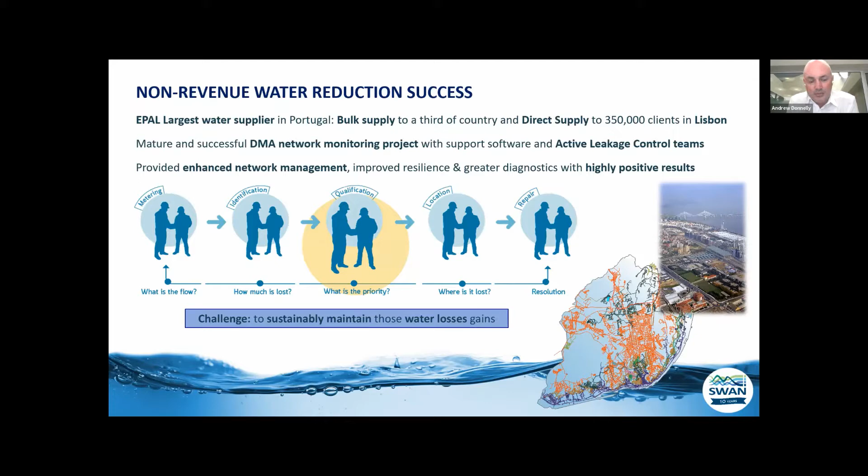How have we done this? I would call it sort of a classic solution of network metering and monitoring, which allows us to identify where the problem is. We then qualify the problem, what is the priority area, and we go out and find the leaks. Hopefully we find out where it's lost, and then we do some repairs at the end to make sure that it's all resolved. But the challenge is to sustainably manage those gains in water loss control over the years.

So again, just to set the scene quickly, we spent largely 4 or 5 years implementing a DMA monitoring system within the distribution network in Lisbon. The results followed quite nicely up to about 2010, where we entered a very stable period of 5 years - we've got the systems, we've got the tools, we have the data, we've got the staff, steady state, constant performance - and then it all started to go wrong again in 2016, where we started to notice an increasing trend in non-revenue water again.

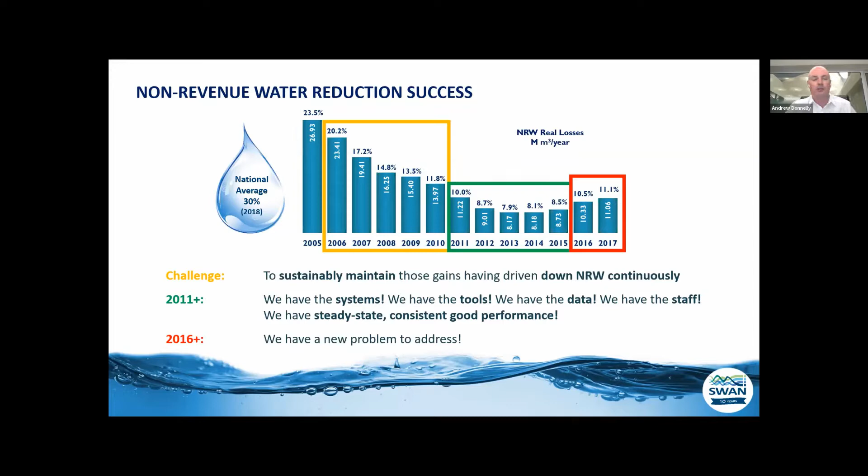Because we have essentially a full DMA rollout across the whole city, as you can see from the map, we were able to quite confidently say that the problem wasn't within the DMAs, but we identified 2 supply zones, about 150 kilometers of mains, where the problem was. So we could eliminate 90% of the network and concentrate only on the 10% that was giving us the problems.

What we did, and I think most other utilities will say the same thing, is that we don't have the same intensity or density of metering and monitoring of our trunk main networks. As I said, we've got target areas of 150 kilometers or so, so how were we going to narrow down where we thought the problems were on that trunk main system? We came up with a new methodology which we rolled out for this particular problem.

We used our hydraulic model to simulate a series of alterations in the network, using DMA meters to temporarily monitor short sections, say 1 or 2 kilometers of these trunk mains. As you can see from this diagram, we opened the boundary valves between a couple of DMAs, continued to feed them normally, but reversed the flow through one DMA meter with closed valves, which allowed us to estimate the volume of losses on a relatively short section.

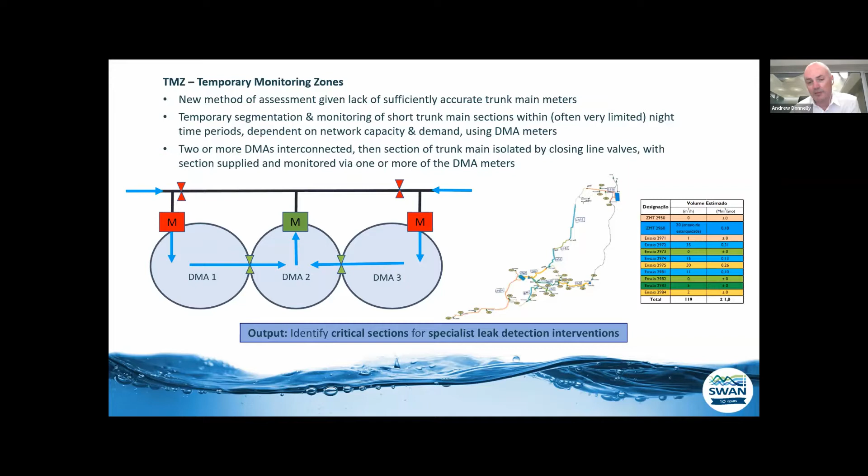Where we could, we did normal leak detection using standard correlation and geophone methods using company resources. We then planned and implemented a Sahara campaign via Xylem and WRC, and a SmartBall trial as well.

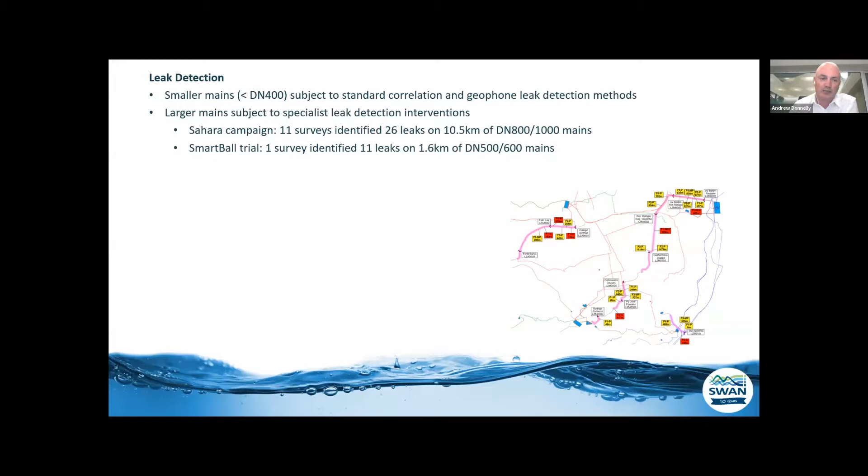These trunk mains run underneath the main streets and motorways within the city. Neither the council nor the police are going to let us go in quickly to do those repairs, and that's why it took us so long to do them - factors which are outside the control of the company.

The SmartBall repairs were done as well, but the SmartBall had to be used in connection with other leak detection techniques to actually pinpoint the leaks. But the results were remarkable in that the non-revenue water in the 2 critical supply zones was reduced by 20 and 45%, equivalent to around 2 million cubic meters of water lost from these activities.

The result of that was a very positive impact on overall company water balance.

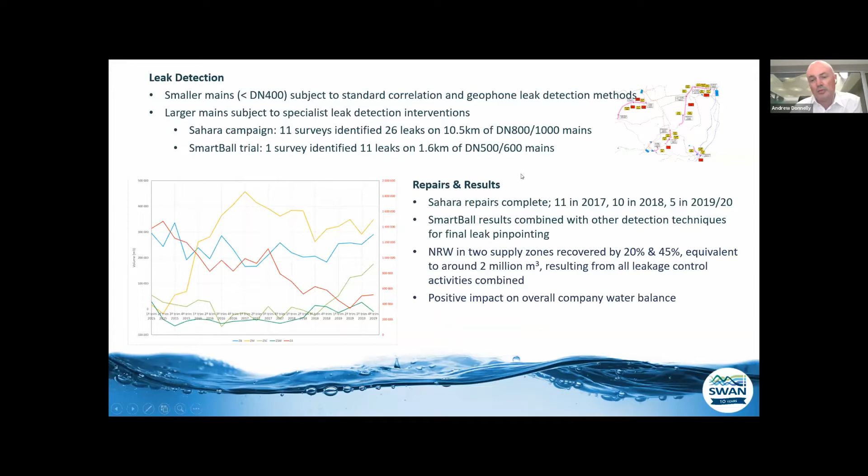In the future, what we would do - we've identified some areas where some additional trunk main meters would be nice to have at a few key points to help us with these temporary metering strategies.

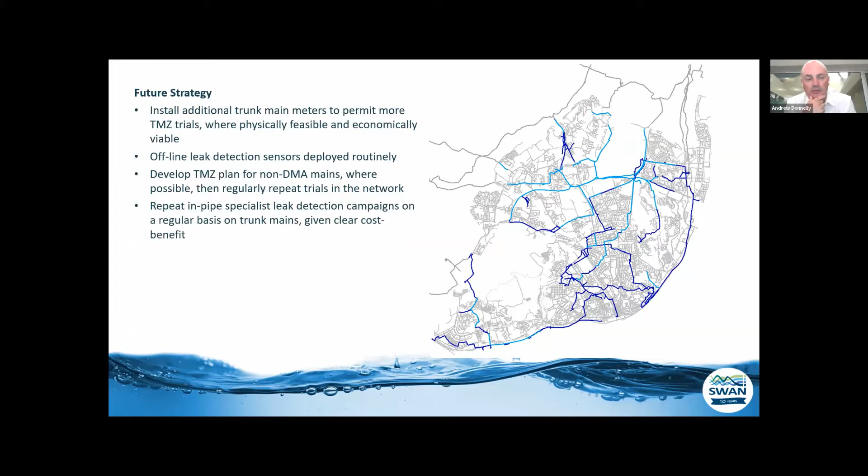We use offline leak detection sensors, deployed more routinely than they ever were. We're developing these temporary monitoring zone plans for all of the non-DMA mains, where we can then repeat them on a regular basis. We're going to repeat in-pipe specialist leak detection campaigns again regularly, given there's a clear cost benefit for them.

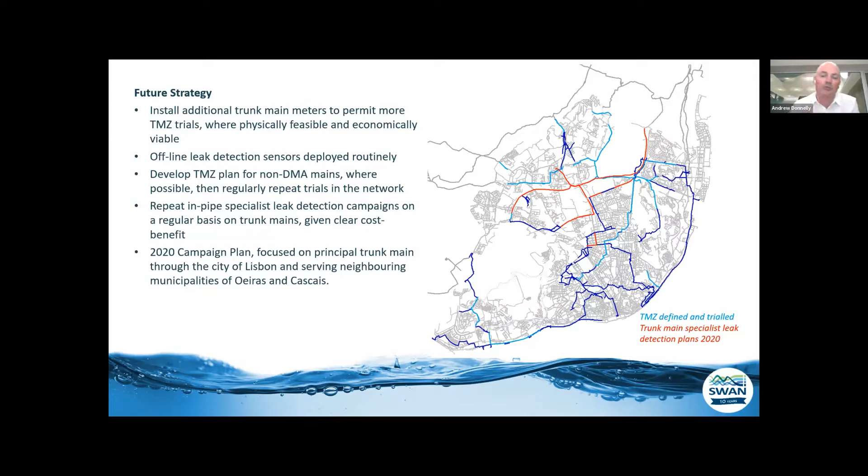We were well on our way with the 2020 campaign, focusing on the trunk main system, when of course the virus crisis came on us. Thankfully we haven't had any big operational problems this year so far, but the plan is, as soon as conditions allow, to roll this plan out towards the end of the year or the start of next year.

So the results speak for themselves. Again, we've reversed the trend - we're going back down, non-revenue water again down to values below 10%. So even though we identified a potential problem, I think we had a positive response to increase in our non-revenue water problem. We've continued the fundamental DMA work and active leakage control and network monitoring using the established teams. It's quite clear that we can't relax from doing any of that fundamental work.

And we've had significant results, limiting the impact on the network, with the very restricted human resources and finances that we have available at the time. So it was a very targeted solution for what we'd identified as specific non-revenue water origins.

So yeah, we're talking about smart solutions, smart water systems, but I think what we've come up with is common sense solutions, but smart people. What really is the most important element within our smart systems? It's smart people, it's us, it's ourselves, and especially with the events of this year, we should value ourselves and our resources and our teams ever more so, given the challenges we've been unexpectedly given this year.

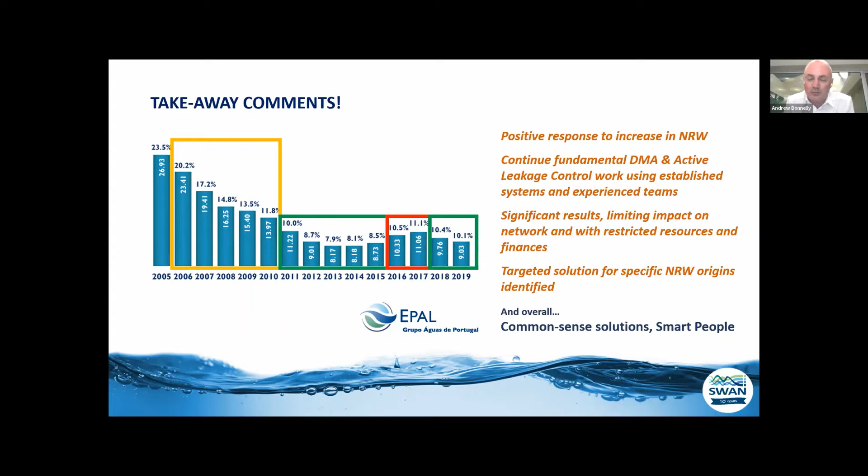Okay, so hopefully that is my quick presentation. Hopefully that made sense.

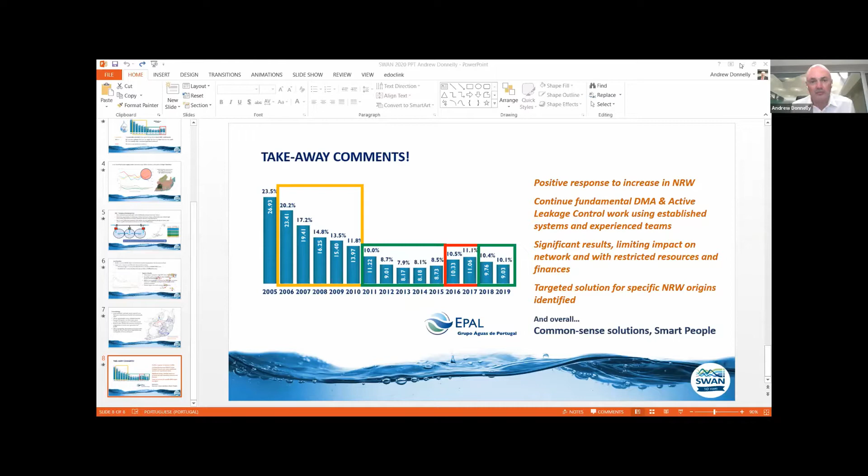Investing in people, and I think part of the success of our project is probably not a great secret, but it's keeping the same people in the team since we started. I've been in the company now for 15 years, and the same people who've been working with me for 13, 14 years are still the key members of the team.

So it's the guys who have helped me set up the monitoring system. They've designed all the DMAs, installed all the equipment, set up the DMAs, and for 10 years or so they've been looking at the data. So all that inherent knowledge that we have has remained within the company, and I think that has incredible value to the company, especially during the crisis of this year, where we've already got all that knowledge in-house.

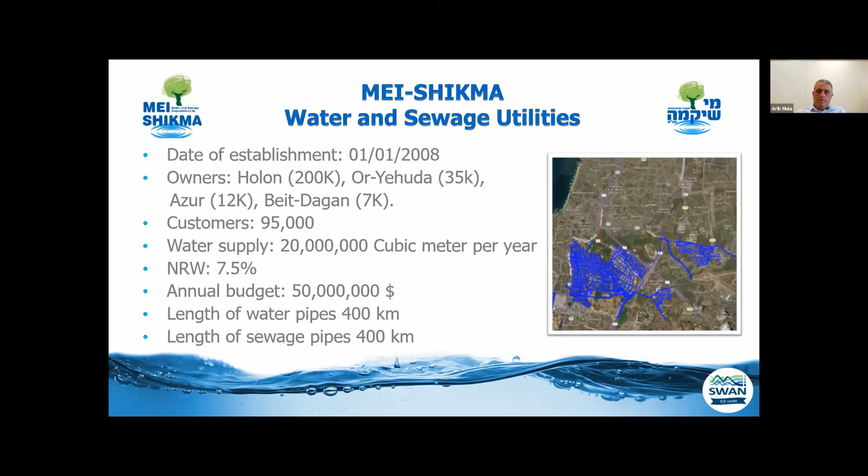In Mei-Shikma, we are adopting new technologies, such as leak detectors that I will speak on later, and many technologies of water quality monitoring, sleeving technologies, smashing technologies, and micro tunneling. We plan and practice a lot of water distribution during emergency times.

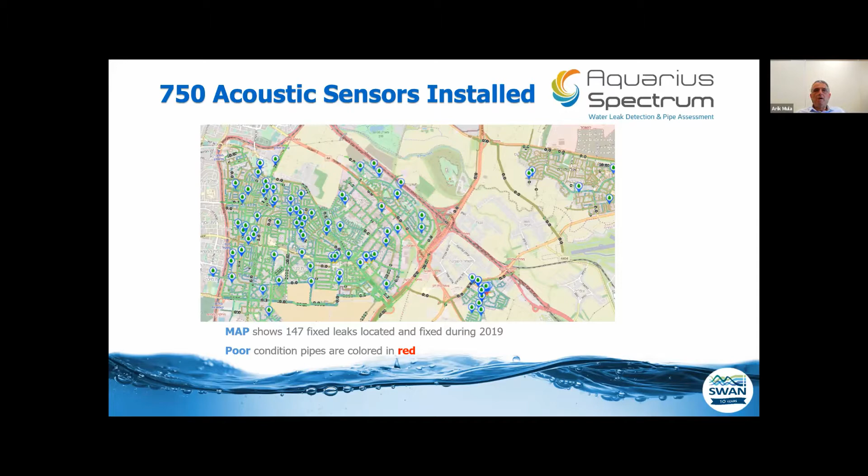In our project, we installed about 750 acoustic sensors over the water pipes. These detectors monitor the water pipelines and locate the exact position of underground leaks and the leak size by the level of noise it makes and its evolution. During 2019, we located and fixed about 150 leaks. On this map, we can see where the leaks are located.

Aquarius Spectrum developed a new innovative solution to assess pipe conditions based on the acoustic detectors and big data analytics. We took from our call center all the leaks that we had in the last 4 years and positioned them on the map. Over this layer, Aquarius put all the leaks which the system found by the acoustic sensors, and the outcome of all this is a map which shows the pipe conditions and the poor pipe sections which should be renewed.

The system ranked them and marked them by red color. You see in this map the red pipes which are in bad condition. On the right side, you can see the evolution of a leak, and the system uses this parameter also to rank the pipe condition.

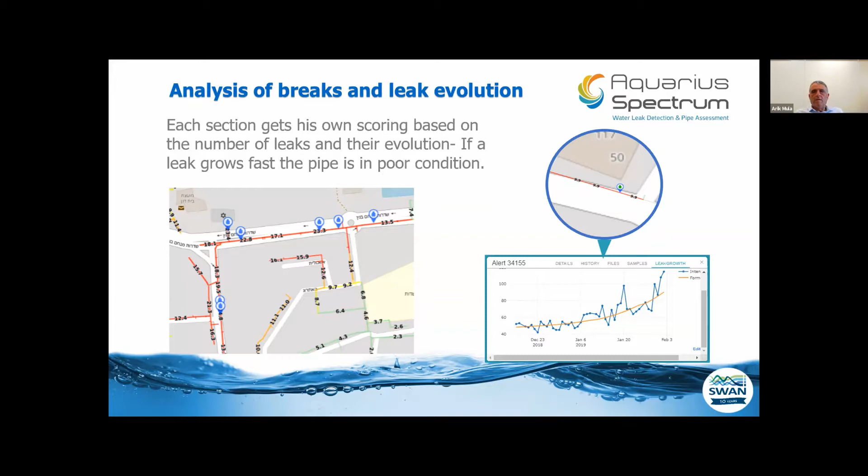In our dashboard here, we can see the results of this project, and we can see that most of our pipes are in a good condition, in green, yellow, and orange color. And we have about 2 kilometers of red pipes, which are in a bad condition, and they should be replaced immediately.

This pipe is ranked, as I said, by red color, and it's ranked by the amount of leaks per kilometer of each section. We can see that some of the poor pipes were installed only 20 or 25 years ago.

What do we get from this project? By using this module, we now replace pipes according to their actual conditions rather than their age. It helps us to plan our budget and allocate it exactly where it's most needed. We don't lose our budget, and we don't change unnecessary pipes that are in good condition.

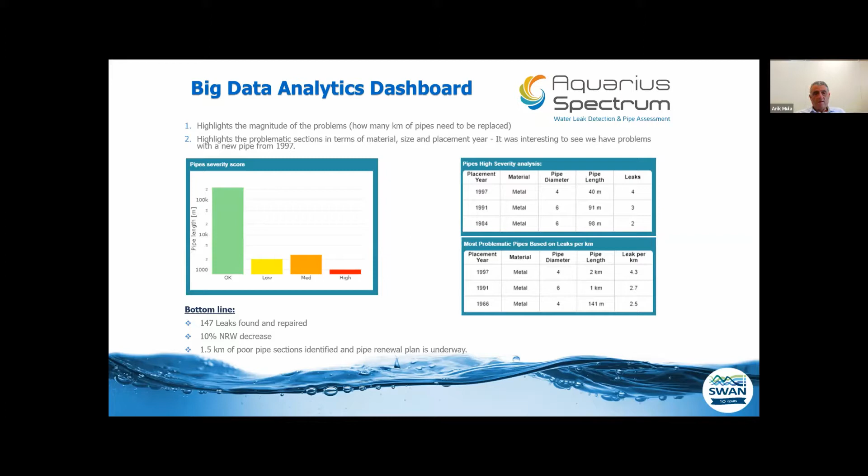We reduced the non-revenue water last year by 10% by acting on this model. Thank you, and if you have a question, I can answer.

Thank you very much, Arik. A question from my side would be: these sensors, are they in a fixed installation, or do you move them around? And second, are there any limitations to pipe material and also pipe dimensions?

We use this detection fixed. We are not moving their location, but it's possible to move the sensor where you want. We bought 750 acoustic sensors, and we spread them across all the pipelines.

These acoustic sensors we use for metal pipes and asbestos cement pipes. We have another option, another acoustic, hydrophonic acoustic, to find these pipes - the PE pipes, PVC pipes, and the large diameter pipes. For these kinds of lines we use the hydrophonic sensors. That's all.

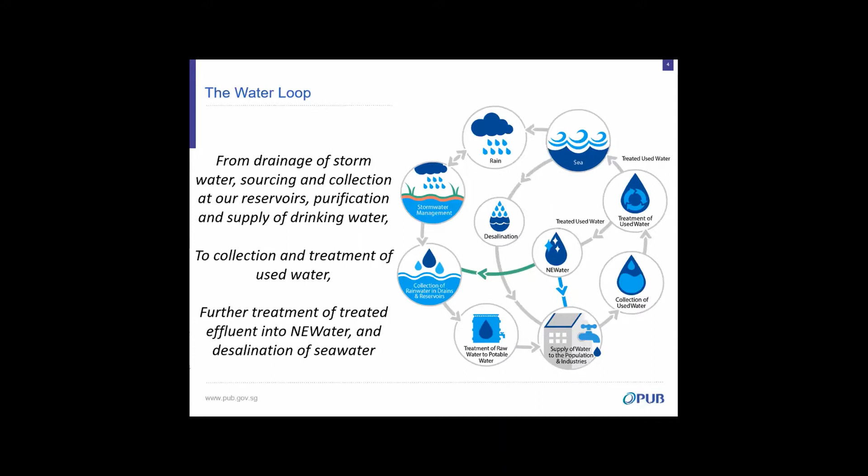PUB, as Singapore's national water agency, is in charge of managing the entire water loop. This encompasses sourcing, collecting, purifying, and supplying drinking water, to recycling used water by treating it into new water. Singapore has four main sources of water, or what we like to call four national taps: imported water from our neighbors in Johor, rainwater collected from our local catchments, seawater treated in the desalination plants, and used water treated in the new water plants.

In September 2017, we started a project to install 120 leak monitoring sensors along water transmission pipelines around Singapore. We wanted to find leaks as early as possible to reduce water loss. The intent is to locate leaks early when they are small, similar to what you see in the picture, so that corrective action can be taken sooner.

The leak monitoring system itself consists of four main components: the processor unit, this is the unit that handles the data; a hydrophone sensor which records the acoustic data; a battery pack which powers the entire setup; and an antenna that transmits the data collected to back-end servers for data processing and analysis. All these components have a really small footprint and can be housed within a chamber.

The system works minimally as a pair, and the more sensors you add on, the longer the stretch of pipe you can monitor. Typically, each sensor configuration is spaced on average 750 meters apart on existing appurtenances. The longer the spacing between each sensor point, a lower sensitivity is expected, and the shorter the sensor spacing between each sensor, a higher sensitivity can be achieved.

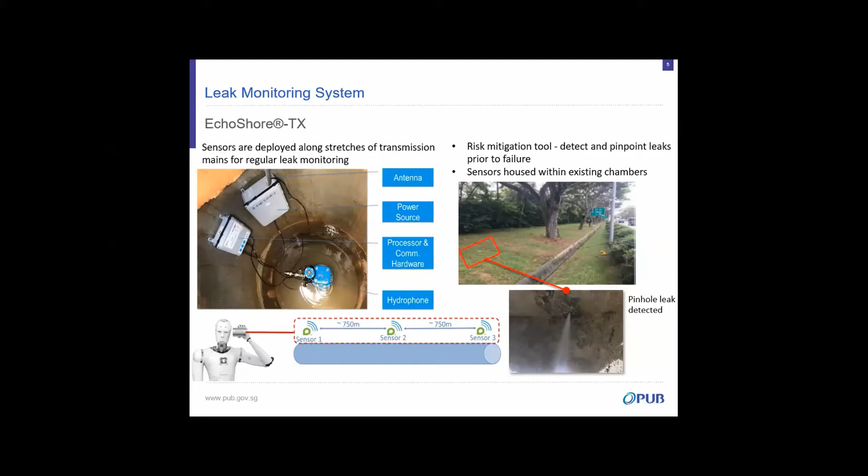The system works similar to a leak noise correlator, but instead of having just 2 or 3 points for correlation, multiple sensors come alive at night to analyze the acoustical properties of the pipeline. Back-end analysis then determines if a leak is present on any segment. If there is, leak alerts are sent to PUB staff for immediate action. Therefore, every day, in just a matter of a few minutes, the areas which have these sensors on them have been checked for leaks.

As I mentioned, an antenna is required for the system to send the collected data through a 3G network. There are a variety of options available which can be utilized in various environments. The antennas can be customized to fit chamber lids where necessary, and one we have here, for example, by the side of the road in Singapore.

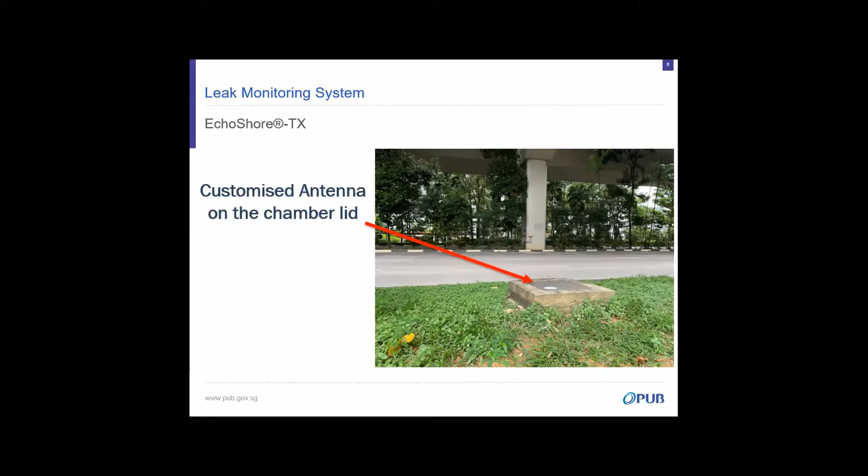Once we got the system in the ground and it started finding leaks, we needed to determine the effectiveness of the system. The project team decided on a unique two-metric system. We decided we needed to determine how well the system detected leaks, which is a ratio of the leaks found against all the leaks within the monitoring segment.

We also needed to determine the classification performance of the system, meaning how well it was able to distinguish a leak noise against other noises being picked up. Naturally in a water system there will be background noises, and the system needs to distinguish between all these noises. By viewing these two metrics together, we were able to determine the leak monitoring performance of the system.

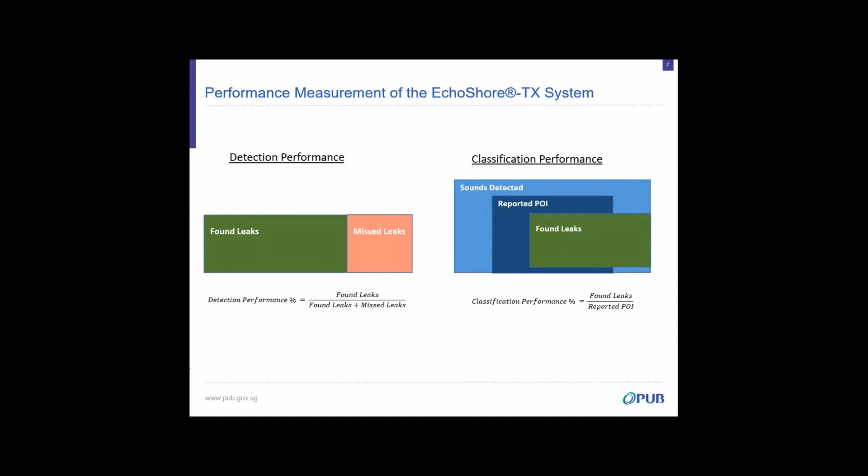After six months upon system commissioning, we saw 100% for both the detection performance and the classification performance. This was somewhat expected, as there would have been initial background leaks in the monitoring zone that were previously not picked up through our regular active leak detection program.

As you move along the project to 12 months and 30 months in, you see that the numbers change. So far, what we've seen is that the detection performance has been healthy, though the classification performance needs to be improved.

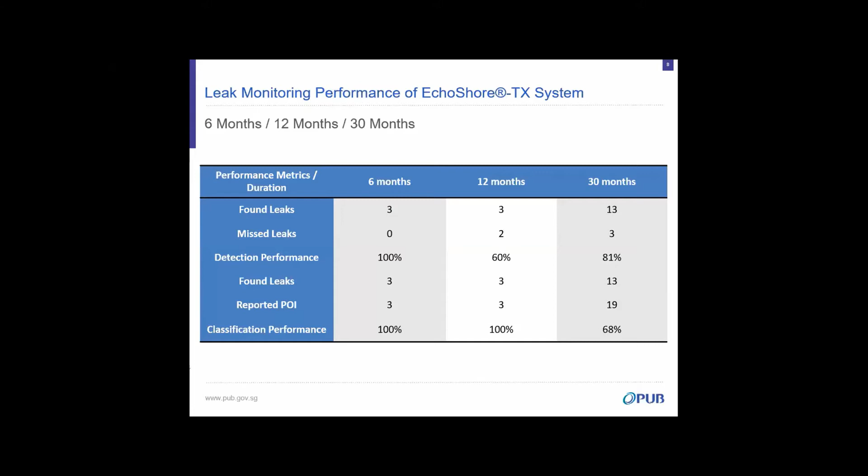Some learning experiences to share with everyone. There are advantages and limitations that revealed themselves as we moved along the project. The clear advantages of the system are that it's able to detect leaks on large diameter pipelines, which traditionally was hard to do.

It has allowed us to reduce our awareness and leak detection time. In essence, the leak runtime is reduced, and so there's a reduction in water loss. We are also able to house the system within existing appurtenances in our network, so less civil cost is involved in actually putting the system in.

There are some limitations. The system is unable to pick up small leaks, as the sensitivity is limited by the sensor spacing. It's also unable to detect a leak outside of the detection window it's programmed for. Of the three leaks that were missed, we believe they had formed outside the detection window.

Another limitation we encountered is when we used an invasive tool within a stretch of pipe that had the leak monitoring system on it, the tool was able to pick up leaks that the system had missed. The vendor tells us that the leaks were deemed too small to be picked up by the system.

Moving on from this project, we've seen tangible benefits in having a permanent monitoring system within our transmission network. Therefore, we are looking to cover 100% of our transmission network over the next two years. That being said, we are actively looking and welcome new and upcoming monitoring technologies to achieve this plan.

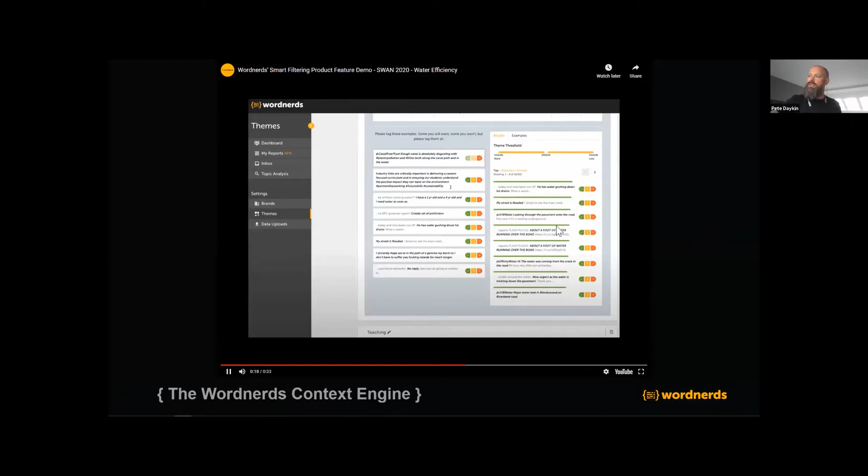So this is an actual tweet that somebody put the other day from a water company. The system finds things that are like this, but use different language. You can see here we've put in things about water going into the way, water gushing, my street is flooded, all kinds of different ways. The AI picks this up from its contextual understanding of language.

And then you can train something in real time to say yes, this is something we're interested in, no this isn't. You retrain the model, and that model will then reduce that data set so it just contains stuff you care about based on what people are saying, not how they're saying it. And I've got lots of percentage figures and graphs to show how accurate we are. So because it's graphs, it must be true.

What does that mean for leakage? Well, we started looking at leakage with a company called Northumbrian Water in the northeast of England a couple of years ago, and we did some really early detection work. We looked at all the different ways that people were using our context engine, all of the different ways people were reporting leaks, and we started setting up alerts for it.

We found really quickly that two things were happening. Firstly, when people saw big leaks or any kind of leak, they were telling the water company directly. But actually a large proportion of people were reporting the leaks to other people, not to the water company themselves. So a lot of these leaks were going undetected.

In this example, somebody sees a leak in Newcastle, a city in the northeast, and at 2:37pm they report that to the council, not to the water company. At 3:32, Newcastle City Council get in touch and say, this isn't our problem, you need to speak to Northumbrian Water. Brilliantly, that is not Northumbrian Water's Twitter handle - it's somebody else's.

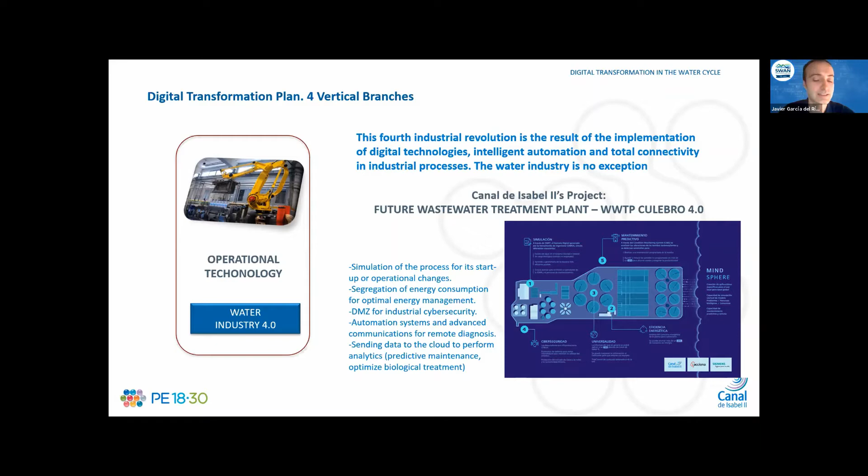One of the projects of this branch is what we've called the wastewater treatment plant of the future 4.0, in which new technologies are being incorporated, such as simulation of processes, segregation of energy consumption, DMZ for industrial cybersecurity, automation systems, advanced communication, and sending data to the cloud, for example.

Connected client or connected user is the last branch. The distinguishing point of this fourth industrial revolution compared to the previous ones is to place the user at the center of the business. An ambitious ongoing project is the integration of mobility solutions for field operation and maintenance, also getting connectivity to external partners like universities and research centers, to improve the performance of wastewater treatment plant industrial processes.

In this regard, one of the applications of this digital industry transformation that will be the future of facility management refers to the hyperconnectivity of systems. Canal de Isabel II has developed a high-efficiency telecontrol architecture, a mixture between a SCADA-based remote control system and cloud-based architecture, that allows the integration of signals from any automation system and connectivity to and from information, operational, and business systems, respecting at all times compliance with the company's cybersecurity standards.

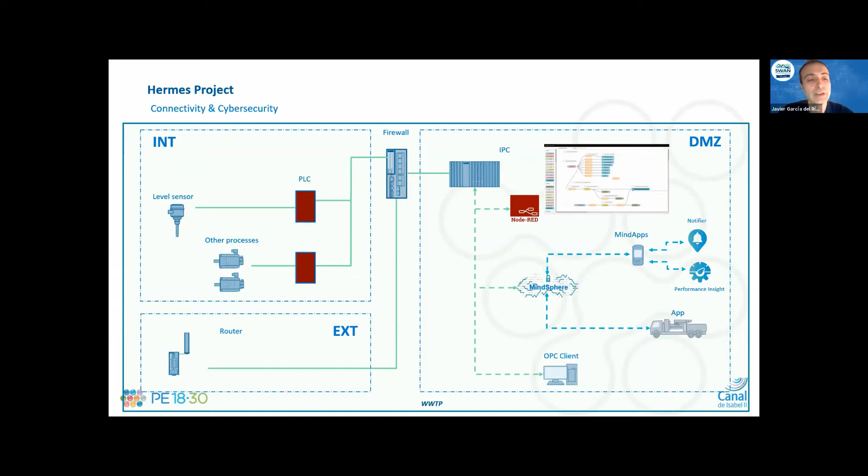The designed cloud-based platform allows data monitoring, dashboard creation, information analytics, application development, as well as connectivity between systems. Canal de Isabel II is developing business value applications with this concept. Another project example aligned to this architecture is called the Hermes project, through which a cloud application has been developed that allows management of wastewater treatment plant sludge.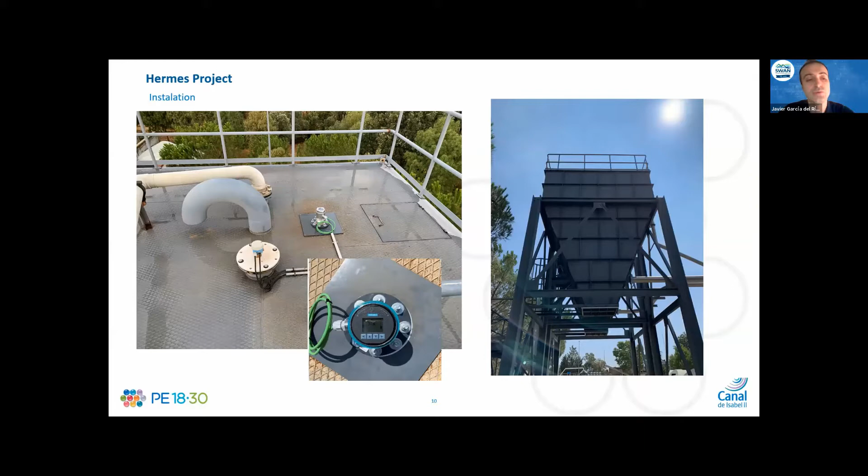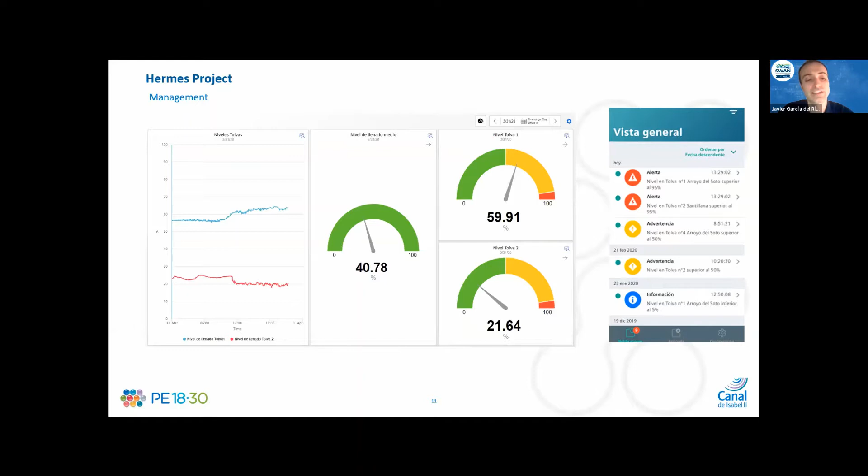The inputs are the signals of the level sensors of the wastewater treatment plant hoppers, regardless of the manufacturer or PLC system, belonging to OT, operational technology. The resulting outputs are work orders in mobility for the removal of sludge, orders integrated in the Canal de Isabel II's maintenance management system belonging to IT, informational technology world. The application is even being developed to achieve optimization of the routes of sludge removal trucks, in the case of visiting several facilities on the same day, with the sending of industrial process alerts to the technicians via mobility work orders.

These are some of the digital projects of Canal de Isabel II, and if anyone is interested in getting deeper information about the projects I presented, don't hesitate to contact me by email or the question panel. In conclusion, it's important to be up to date with main technological trends related to digitalization and Industry 4.0 to transform data into value. Thank you very much, and Tom, I give you the floor.

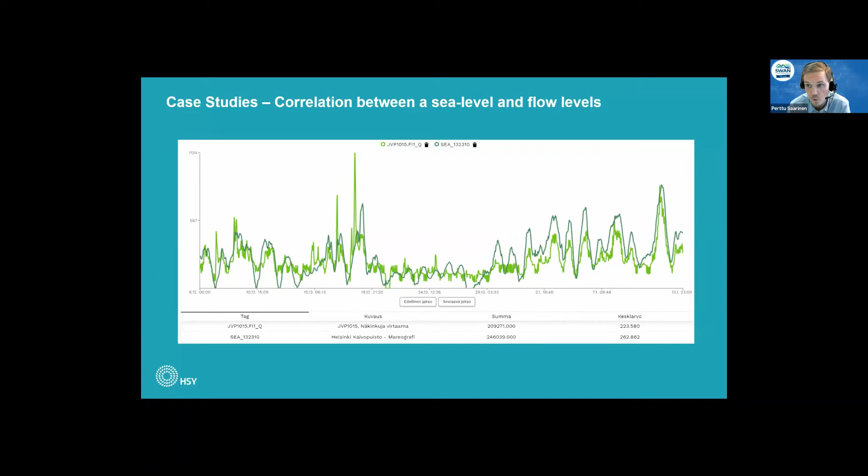So overall, we have reduced the amount of overflows and also reduced the amount of infiltrated water into our network. And this is actually all done with the data we already had. We just needed to use it more effectively. And Neuroflux has been a great tool for that, indeed. And that is my presentation. Thank you, looking forward for any questions later on.

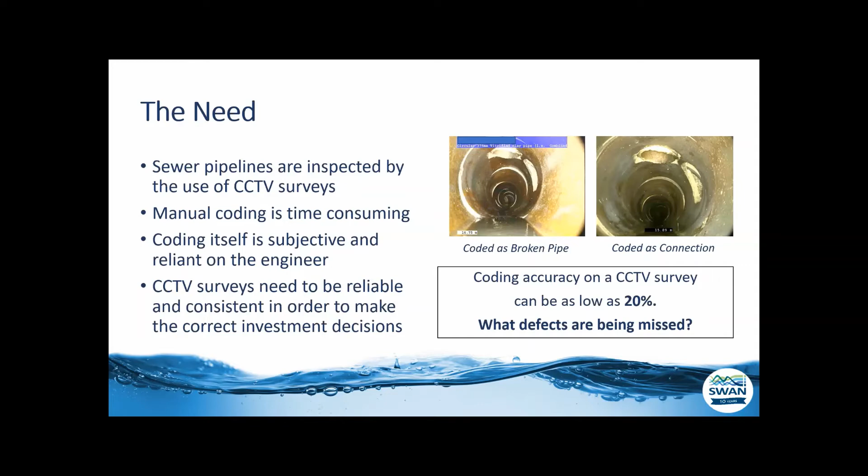So a bit about United Utilities. We're the water operator for the northwest of England. We serve about 7 million customers, and we have over 77,000 kilometres of sewer network to maintain. Put in context, that's enough to go around the world twice.

On average, we survey about 1% of that sewer network each year, broken down into different aspects of surveys ordered by different teams. A large percentage of that is coded surveys, which makes a really important part in us understanding our asset condition and formalising our future asset management plans.

But we also have a large amount of uncoded survey data, and this is simply video footage of a camera traversing down a pipe. Whilst it can tell an operator what might be going on, there's a lot of important data there that is getting wasted, and this is something we're quite keen on how to unlock.

We spend about £3.5 million a year surveying sewers. Within the business, we've got a real desire to move to what we call a systems thinking approach. We want to unlock the value of all of the data that we use, particularly here on CCTV surveys, making sure that data can be used business-wide, is centralised, well-structured, and can hopefully move us towards making more machine-led decisions and remove some of that subjectivity.

So that was the problem and the business case for United Utilities. We got a call out through our innovation lab, and that's how we found VAPAR. So I'll hand over now to Michelle to explain what they do.

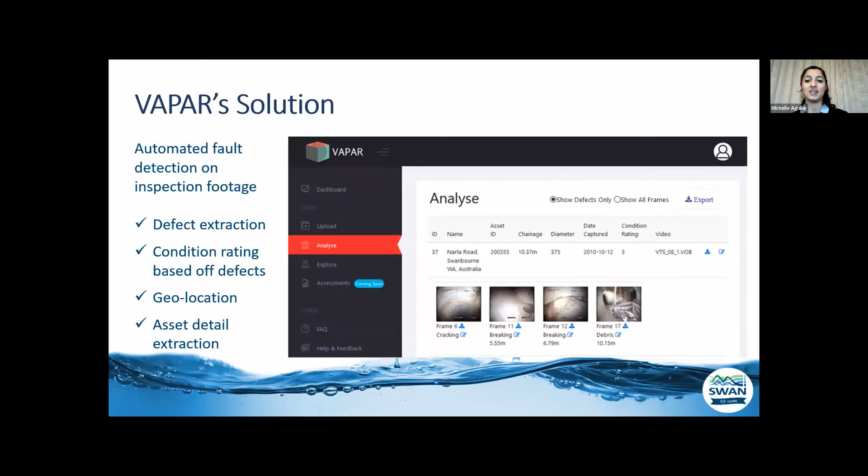Essentially the way it works is that we've trained deep learning models on thousands of examples of pipes and coupled this with computer vision techniques to produce a standardized, objective condition assessment and inspection report in a way that's easy to understand for quick decision making.

It's also hosted on the cloud so that we can keep the data all in one central location, and so that we can tighten up the turnaround time between the inspection footage being captured and a decision being made.

United Utilities' involvement through the Innovation Lab was largely around sharing data with us to help us further develop our models and accuracy and getting a deeper understanding of their processes and figuring out where our system could be used for optimization. United Utilities have also assisted with standards alignment and have been really driving the conversation for AI and pipes across the UK water industry.

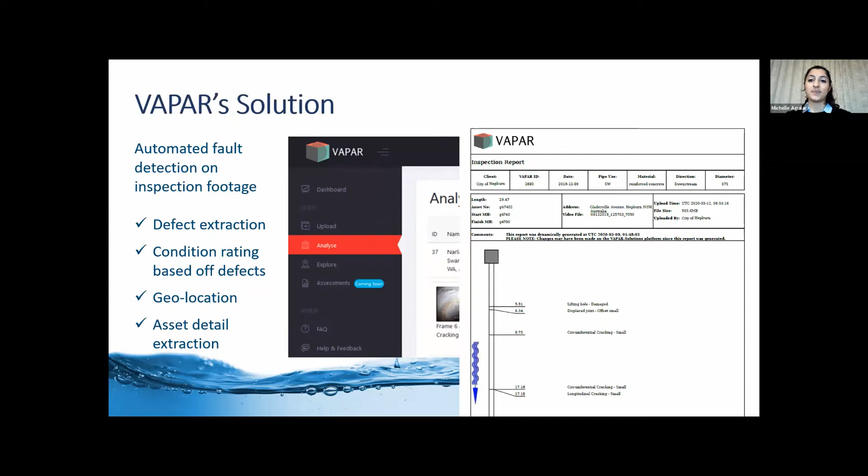Since the lab, we've continued refining developments with United Utilities to close in on requirements to meet the UK standards, but also to be able to identify issues for the developer services team, who face a different set of challenges in the risks of adoption of new networks for the utility.

So in being able to partner with United Utilities, some of the new developments we've been able to achieve is a higher overall accuracy in all feature detection, with a faster turnaround time as well on our video processing.

We've been able to add extra classification outputs for richer data insights, such as detecting anomalies in water level for issues like dips, detecting low quality footage and loss of vision, and detecting the pipe material off the vision alone.

United Utilities also asked us to develop several value add features to the web platform so that we could streamline that end-to-end process, which we're now trialing with the involvement of United Utilities contractors for CCTV as an intelligent contractor model. The most recent thing we're working on now is the automation of remediation actions.

So once you understand the condition of the pipe, actually figuring out what you're going to do about it. We're trying to make consistent and data-led decisions through this partnership. By having the contractor involved in this project, combined with instant objective remediation suggestions, this has the potential to significantly tighten up that end-to-end process, which at the moment has way too many touch points for everyone.

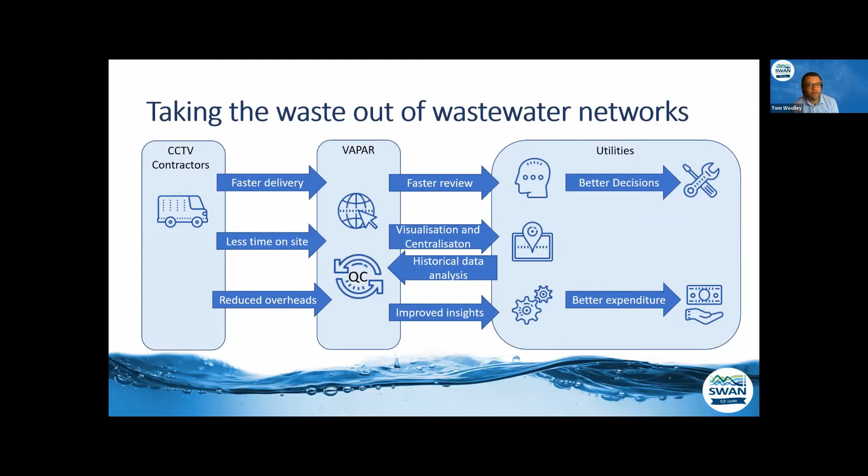Thanks, Michelle. Thanks, James. I'm a bit of a sewer nerd myself, so I find that really interesting. A really good example of the innovation process of United Utilities, which those of us in the UK hear a lot about, and how successful it can be in promoting early stage startups. So really good presentation. Thank you very much to both of you. Thank you for staying up, Michelle, as well, or waking up early, whichever one.

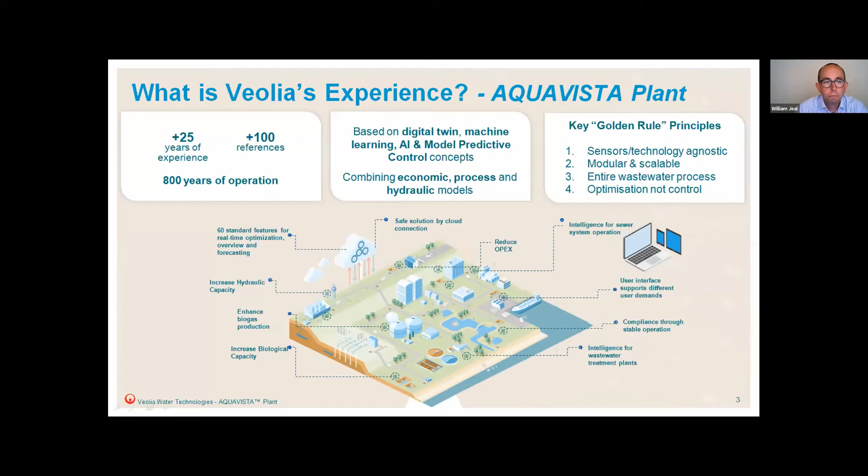The first example I'd like to share with you is a wastewater treatment site southwest of Copenhagen. The primary challenge for this customer was frequent sludge escape during stormwater events, and the manual interventions associated with rectifying this issue. Our initial solution focused specifically on meeting this target.

Under max flow conditions, by optimizing the plant in real time, we're able to increase the hydraulic capacity of the plant by over 80%. Importantly, thinking about those indirect challenges I mentioned at the start, control of this plant now happens completely automatically. So the manual interventions required for controlling these stormwater events has dramatically reduced.

With that business case established, the ROI was just under 2.5 years. We then worked with the customer to enhance that system and grow it to meet OPEX and other performance drivers.

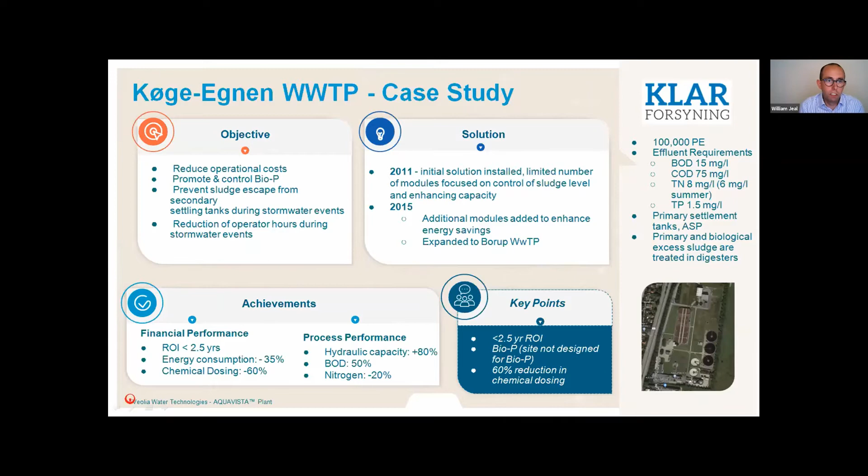For the next example, we stay in Denmark. This is a Danish utility called Blue Kolding. This time it's not a single site—it's an entire utility, with treatment plants and networks optimized using Aquavista Plant. Similar to the previous case study, we started small and expanded the solution over time.

Starting off, we focused on energy reduction and improving stability at their main wastewater treatment plant. We took the customer on that journey, taking baby steps, so to speak, in terms of building confidence within the customer business, and particularly the operators, that this is a solution they can work with.

By challenging the traditional solution of simply building additional capacity, we were able to reduce the CapEx budget of this solution by 2 million euros—essentially by combining real-time optimization with a small amount of additional capacity. I'm not saying the real-time optimization solution completely eliminated the need for capital investment, but it certainly reduced that budget. We're still continuing to work with Blue Kolding now to deploy further advancements we're developing all the time as part of our R&D process.

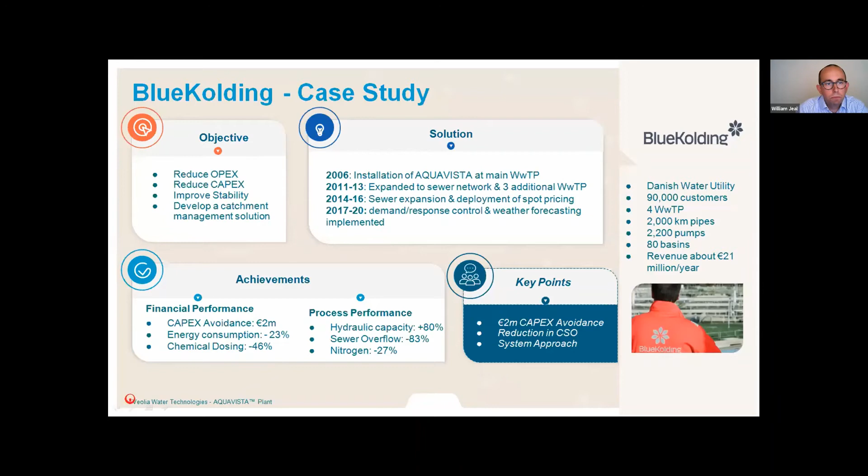So I hope those examples have been interesting and helped to articulate with real-time optimization how we can meet both those direct and indirect challenges, and how we can make digital transformation tangible and scalable. I think that's often a key challenge: how do we deliver something tangible? And also the importance of taking that long-term view and ensuring that what we deploy today is fit for purpose in the long term. So thanks very much for your attention, and back to you, Tom.

Thanks, William. Really interesting, and really good to see a real movement towards real-time optimization rather than the more traditional decision support methods. I was about to ask a question, but one of my fellow panelists has just answered it. We're scheduled to finish in about 3 or 4 minutes, so I've got a couple of questions which I'll put to the panelists. We'll go in a similar order, so I'll start with Javier. Javier, which area do you think is most in need of innovation for wastewater network management?

In my opinion, the most pressing area is the integration and development of information and communication technologies to achieve process optimization - in other words, an approach to management in real time. Excellent, thank you. Yeah, so it's quite a similar theme to what we heard earlier from the water side, how we can bring things together.

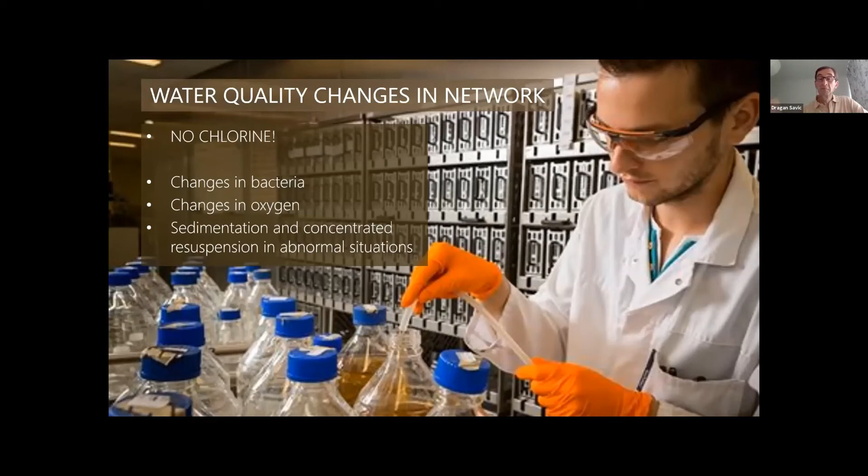Previous experiments with water quality sensors placed at households suggest a minor but distinct worsening of water quality considering oxygen, color, and turbidity. Since we do not use chlorine, it is expected that bacterial growth within our mains is changing water quality. In order to study these components, Vitens constructed a smart DMA called Westeinde to get better insight into flow and water quality aspects inside the DMA. This DMA contains approximately 1500 connections, about 95% of which are equipped with a smart meter. Besides a few shops, these connections are mainly households.

This DMA is situated in a transition zone between two production locations with different water quality. Previous research in other parts of Friesland, where these two water types mix, often showed elevated bacteria counts.

To get more insight into the detailed flow patterns in this highly mazed network, we want to check the calculated flow patterns using conductivity sensors. Ultimately, we want to optimize the flow pattern in this DMA by closing and opening valves at specific moments to minimize the maximal retention time in the system.

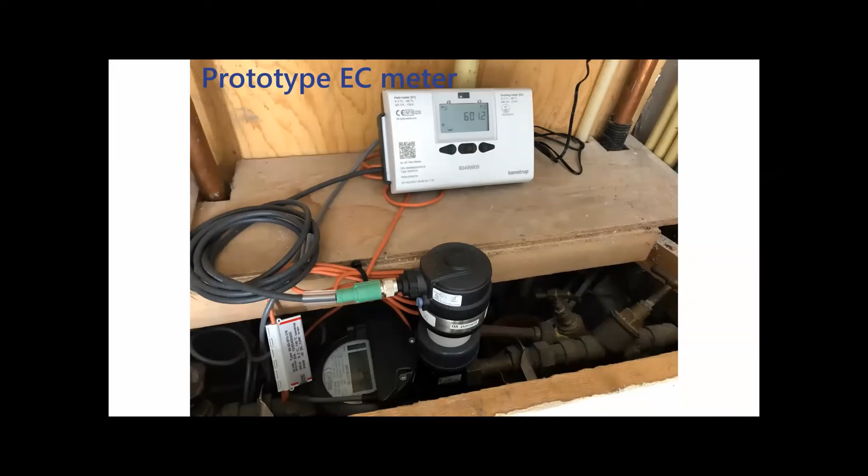Conductivity sensors have proven to function very well for tracking water flows within our network. Since installing a conductivity sensor with telemetry is quite costly, we are experimenting with conductivity sensors combined with smart meters. This gives us the opportunity to transmit the conductivity value together with the signal of the smart meter. This picture shows the first installed prototype.

This prototype was quite large. 9 smaller versions are ready to be installed. However, again, the COVID-19 outbreak has prevented them from being placed.

After installing all conductivity sensors, we are able to trace every drop within our network. We need these measurements because we want to control the water flow by opening and closing valves to minimize water residence time and optimize water quality. By using these sensors, we can check and calibrate our hydraulic models and verify these models as a digital twin.

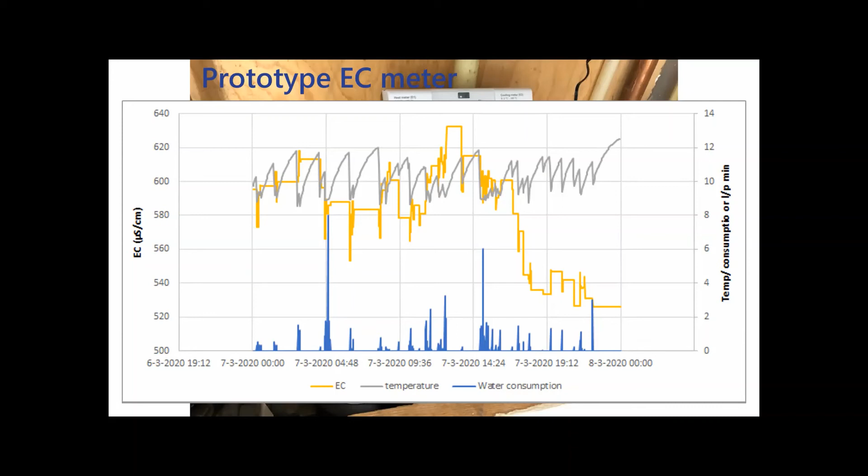Our next steps: this week we are starting to take grab samples at fire hydrants since we are not allowed to take grab samples at households due to COVID-19. In a short time we will place actuators at valves to remotely control water flows, and as soon as we are allowed to, we will place the remaining electroconductivity sensors.

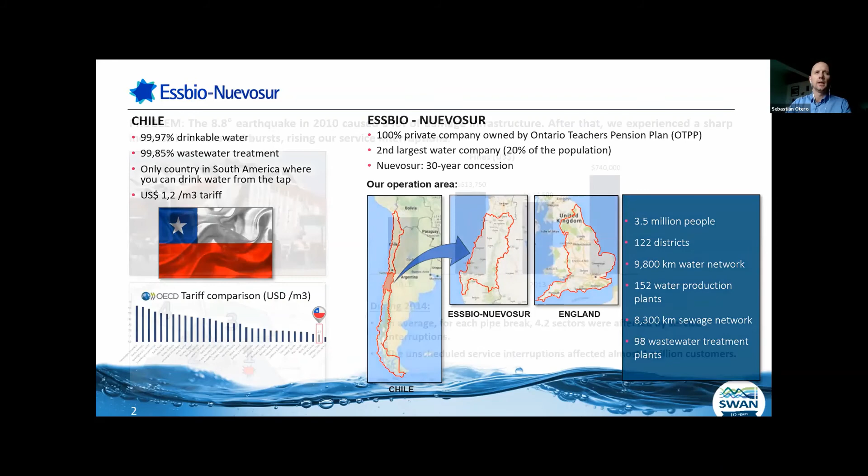Chile is a very seismic country. In 2010, we had a very large earthquake, 8.8 degrees, and that caused a lot of damage to our infrastructure. After that, we experienced a sharp increase in breaks and bursts, raising service interruptions by almost 30% in around 4 years.

We discovered that on average, for each pipe break, over 4 sectors were affected by service interruptions. This means that if we had, for example, a break in sector number 1, 3 other sectors were affected by service interruptions because of the lack of alternatives to keep the service running during the repair time. By sectors, I mean part of the network with usually 100 to 300 customers that you can isolate with existing valves in case you need.

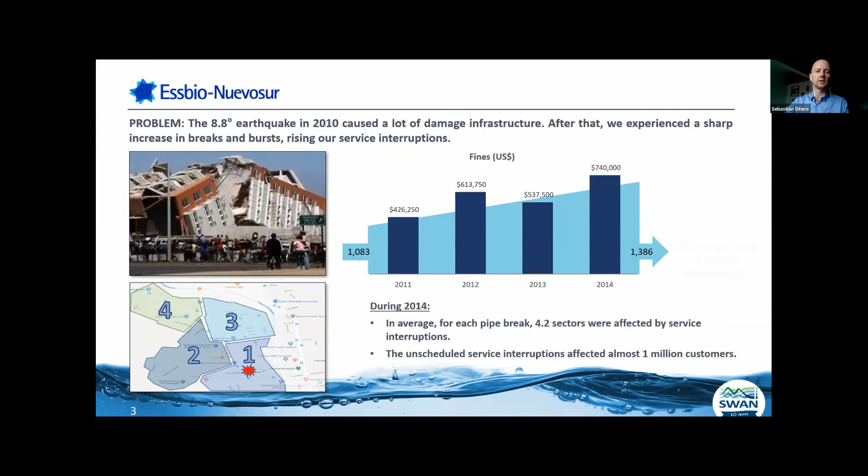Similar to a DMA, but not with the metering. So in 2015, we started a plan to reduce the service interruptions.

First, every break is now followed by root cause analysis that starts with very simple questions like, did we have other sectors affected by this break and why? Is it the first time that this pipe breaks? Do we have pressure problems? Do we have pipeline problems? Giving use to all the data we had, we are now defining the optimal solution to the problem that caused the service interruption to one or more sectors.

Second, we changed our operational target. It used to be minimizing the delay in repairing every break, but now it is to minimize the customers affected by service interruptions, centering our effort in closing the right isolation valves. Additionally, we are increasing the use of clamps and other trenchless technologies to replace and repair pipes.

Third, with the use of hydraulic modeling, we are improving pressure regulation in order to prevent new events and adjusting the network sectorization by replacing isolation valves that are in bad conditions and making pipeline interconnections to increase the resilience. The target is always to reduce the customers affected in case we have a new break near the same location. Finally, we are investing in monitoring and control such as pressure loggers and smart PRVs.

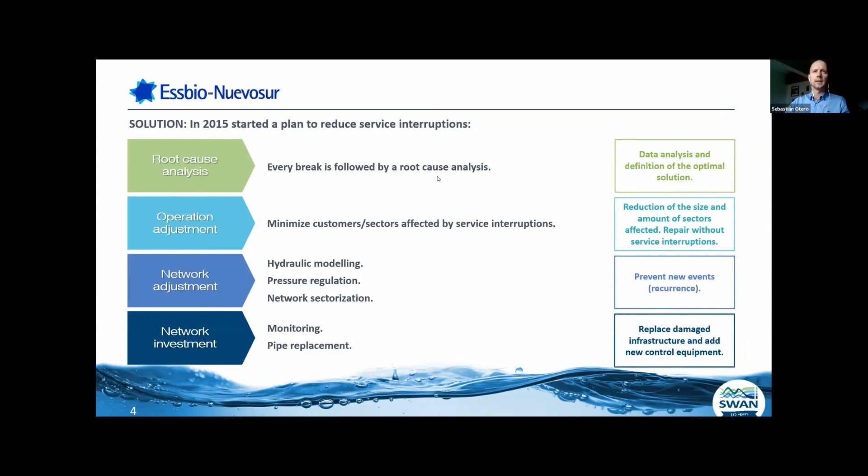So that's how every year we are investing in around 10 new PRVs. We are installing or replacing almost 200 isolation valves among the other actions.

This way, the plan has achieved a significant reduction in customers affected by service interruptions. A better network sectorization has helped us minimize the area affected by breaks, while better pressure management has reduced the number of breaks and bursts.

As a result, our customers affected by service interruptions have decreased by over 60% in these 5 years. And the sectors affected by recurrent service interruptions - meaning 3 or more interruptions in 1 year - have decreased by almost 90%.

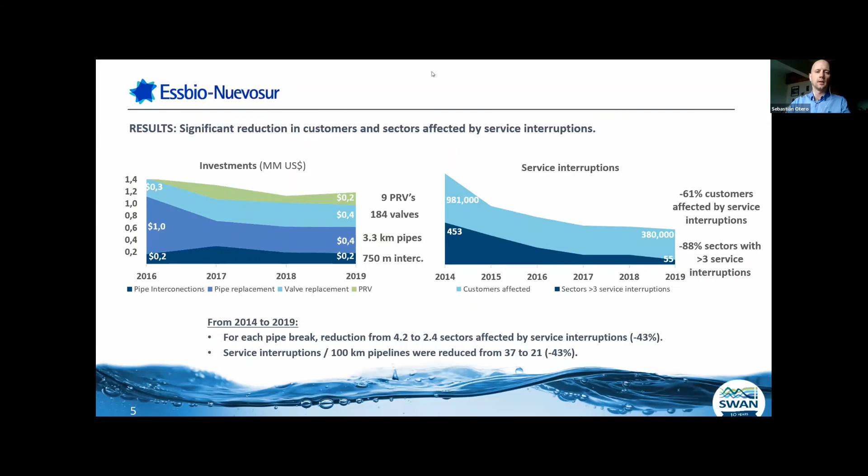So now our next steps or challenges: we still need to reduce the size of our biggest sectors. We still have a lot of sectors with more than 300 clients. We have to reduce our repair times during pipe breaks, and therefore we need better information and support for the field teams, especially during big events.

Finally, as conclusions, I would like to say that service interruptions, as we all know, have a big impact on customer service quality. So smart actions go beyond infrastructure replacement. That is why root cause analysis and data management are key to success.

Operation adjustments have a significant contribution at a very low cost, but require high commitment of the field teams and support from the back office teams. And finally, with strong data analytics, the investment in infrastructure will be better prioritized, leading to much better results in performance, costs, and customer service.

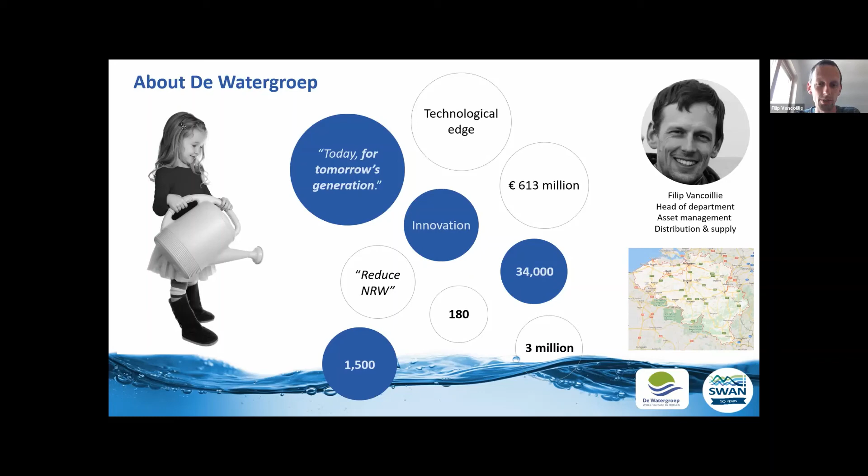The last number that I did not explain already is our turnover. We have about 600 million euros turnover. And if you talk about asset management, it is unavoidable, in fact, to bring up the subject of non-revenue water, so that's why I will talk about that in the following slides.

So I want to explain that our water system is under stress. I'm convinced we're not the only water utility experiencing this situation. We can explain this by the fact that we've experienced prolonged droughts in the last several years, which was really unknown for the people living here. But together with that, we've experienced increased peak demand, even in seasons of the year where we did not see this before.

This year in May, we had an extremely high peak demand, never seen before for our company. And well, in fact it's not just this peak demand, but there are also changing expectations of end customers, related with changes in our society and technological changes. And of course our business is asset intensive.

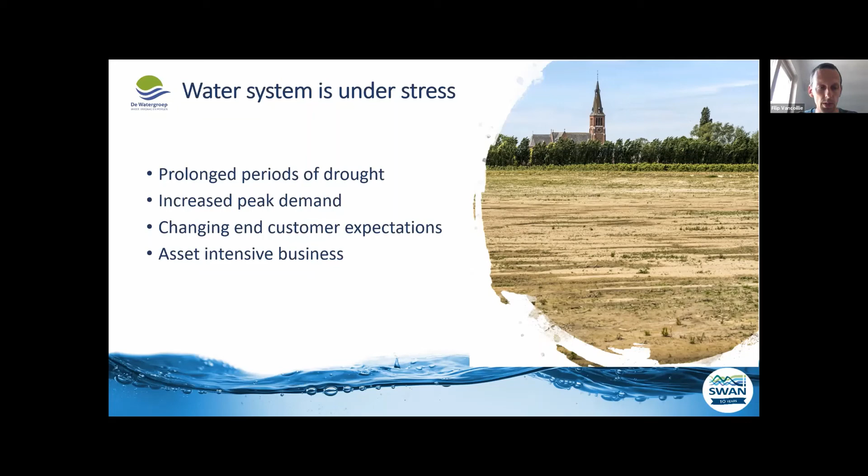So that's why we focus on the optimization of asset management. We adopted a holistic action plan to reduce non-revenue water. In a time period of 3 years, we have the reduction goal to reduce real leakage by about 50%, so really an important and fast reduction. And then in another period of 4 years, we aim to reduce this by half again. So really an ambitious goal.

I will explain a bit how we do this. We can do this so fast because we have a lot of best practices and experiences developed within the company that we are now scaling up, to make sure everyone in the company is working along these best practices. We also adopt state-of-the-art technology in different domains, together with participation in research for new technology not yet available on the market.

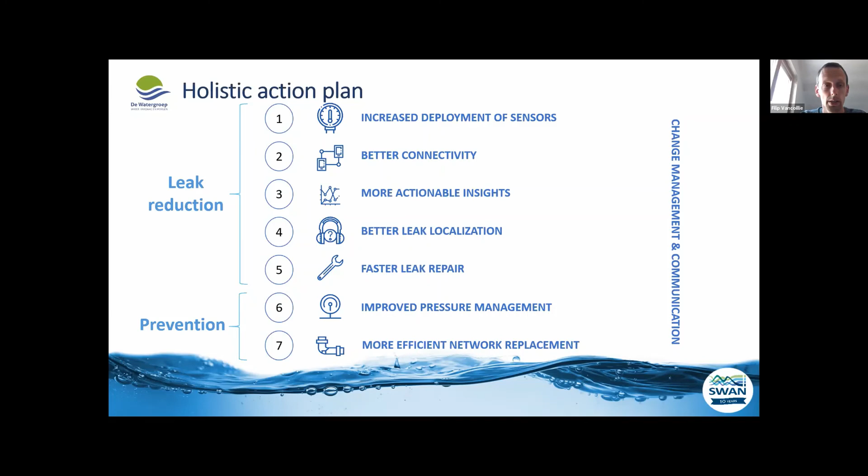I have two images that give some more insight in our actions. So here you see the area we are responsible for drinking water, and the different colors are the DMAs. That's about 400 DMAs, and you can see that there are some DMAs that are in yellow, which means that those DMAs are at this very moment in focus to make them smaller by installing more pressure and flow sensors. So we combine always flow and pressure measurement.

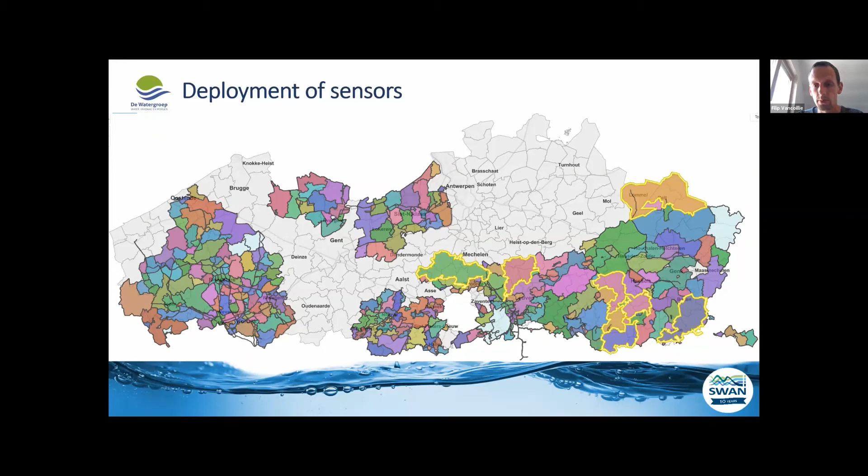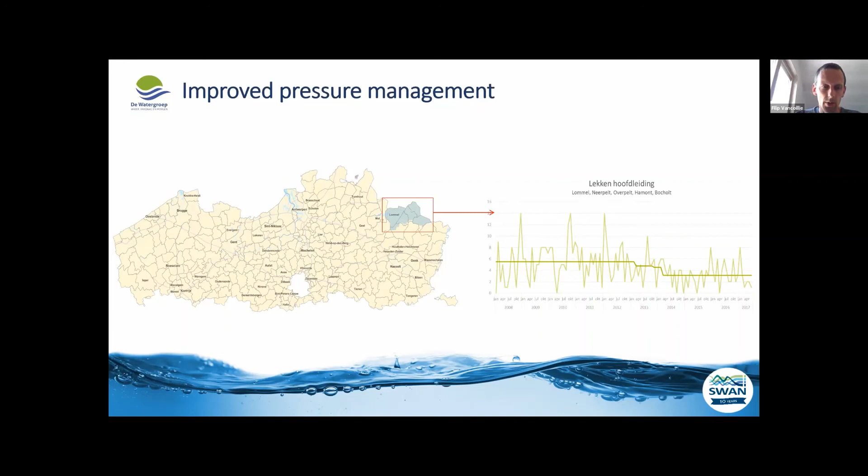I have another image which indicates some results on pressure management. So in the north of the province of Limburg, we were able to reduce the number of mains leaks, mains bursts, by about 40%, just by calming the network. So the average pressure has remained the same, but the pressure transients have been reduced, with quite good results. Okay, so that was some insight on our approach for reduction of non-revenue water.

Thank you, Filip. Filip, just a brief question. In your bio, I found out that you've got a master's in cultural and development studies. Seldom we see that with civil engineers, and you also have a master's in civil engineering. So can you just tell us how do you find that balance between implementing all these technologies and the change management within the organization that is required for it to be embedded within it?

Yeah, well, I think technology is what interests a lot of people among us. But if you want to create change and have results on a larger scale, it's fundamental that you are aware that there is a lot of people involved, and so there is a lot of attention needed on change management in order to make every operator involved, to motivate them. By addressing this change this way, you also create a kind of grassroots motivation and way of working. So there's a lot of ideas and a lot of knowledge available in these operators, and if you can untap this resource, it's really powerful. So for me, it's the combination of the two that is really key for success.

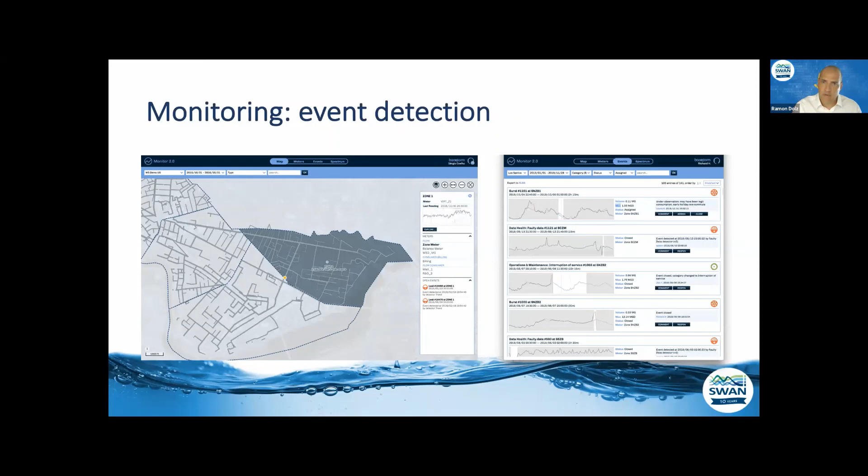Then we add more information to data flows, combining it with pressure or other data available at the inventory level, like installation dates, diameter, materials, and all relevant information at the utility. On top of that, we add layers from public sources like weather, buildings, traffic, or railway roads -- all the information that the utility, with its experience, thinks can impact pipe failure.

Then we can generate results that help our customers better understand how pipes are going to fail. We don't determine a fixed lifespan for each cohort of pipes, like saying steel pipes last 80 years. Instead, we calculate a failure rate for each individual pipe on the network, today and in the future. This is dynamic because it's fed by the daily information coming from the utility.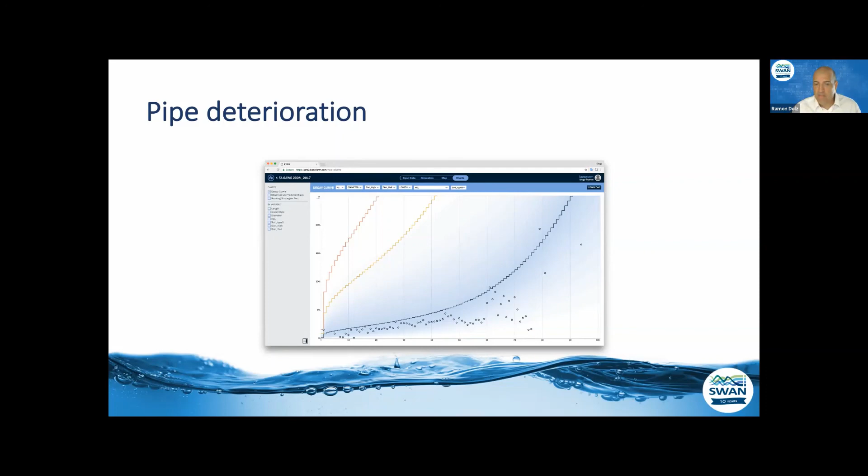This helps show that asset management is not a static activity, but is influenced by daily activity and changes over time. For a pipe that has never broken, you see the blue line, and once it breaks once, it's the yellow line. Finally, the combination of different data sources gives us the ability to provide metrics that help our customers prioritize renewals based on their goals, such as water loss from breaks or any other indicator the utility uses.

The important aspect here is that the combination of failure prediction with the consequence of failure for each pipe can finally give a risk value for each pipe that helps our customer optimize their CapEx. Our results: we now have 200,000 kilometers of pipes for about 20 million people served. Our experience is that our customers are multiplying by more than 10 the efficiency of their renewal plans. So this is what I wanted to tell you today.

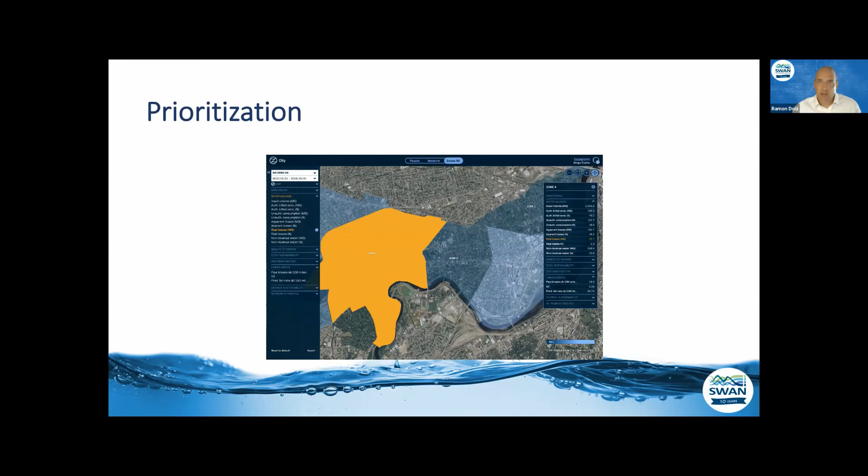Back to... Excellent. Thank you, Ramon. That was very, very impressive. We have 2 minutes, so before I ask you that one question that I can expect a short answer to, I have to thank all of you for today's brilliant presentation. Lots of innovation, lots of mixing of cultural change within organization and technology. It's not just the technology, is it?

So for you, Ramon, the classical question: do we need more data, or do we need more quality data? Everybody is complaining we don't have the data, but when we have the data, it's not enough quality, yeah?

Yeah, Dragan, actually that's a very good question. And as I told you, we don't come from the IT scenario, we come from water, and we knew the challenges water utilities have when implementing a solution like ours. So from the beginning, we thought we should be able to generate results with the existing data. So when you don't have many data, maybe you think you don't have much, but at the end there's a lot of data. And our software is able to fill the blanks, using all the data we have.

And also we are able to reconcile repositories of information. So imagine you have your work orders in an Excel sheet with an address number - we can assign the failure to the pipe in the GIS, and things like that. So you don't need a specific amount or quality of data. Of course, the better the data and the more data you have, the better the results, but you can start with your current situation.